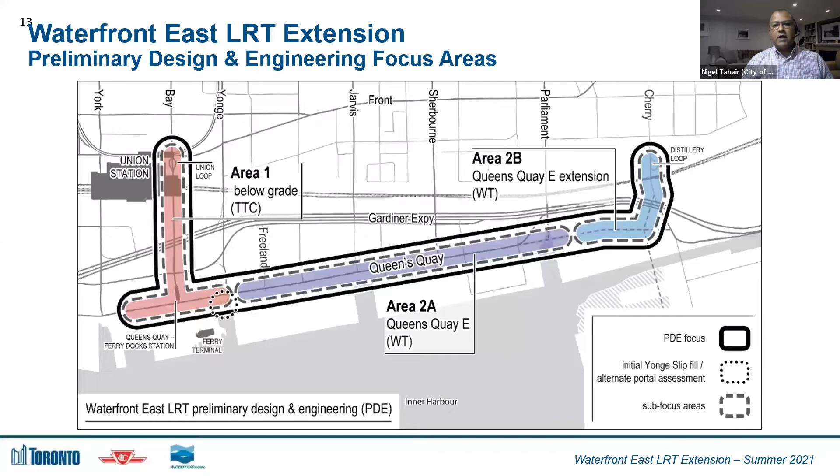The second component of the study is the surface section, starting at the portal where it meets Queens Quay, roughly at Yonge Street, and extending over to the silo building just on the east side of Parliament Street. The final section of the study is a new section of Queens Quay that will be built over to Cherry Street in the coming years, and then a connection that ends at some point on Cherry Street. That's the overall scope of the project.

In terms of the timeline and where we are today, we're in our second round of public consultation. We have one more planned for early fall this year, which will lead to a report on the project to executive committee and to council for a decision and direction. The date we're targeting for that final report is October 27th, which is executive committee.

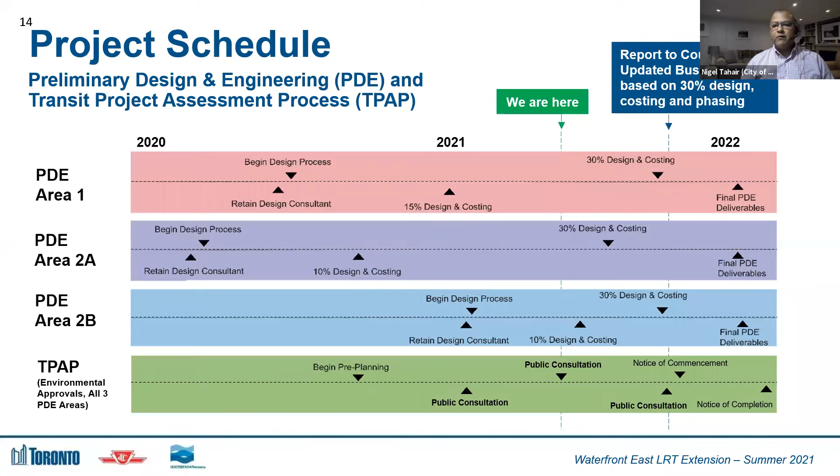And following that, it will go to city council in November. We're generally on schedule for this project, although time is compressed as we get into the summer period. Following the report to city council, we'll be presenting the overall costs of the project, the 30% design, the business case, and also our notification to proceed with the environmental project report. This all sets us up, as Councillor Cressy said, in time for the budget process, which goes into early next year.

In terms of upcoming reports, we do a number of interim update reports. Just last week, I mentioned at our SAC meeting that we are aiming for the latest update report to Executive Committee on July 6th. That update report has since been updated -- that's what happens in just a week's time around here.

The Waterfront project, as well as the Eglinton East LRT project, won't be covered in that update. That report is focused on all of the other major transit projects going on in the city right now, and that's the focus of the report. So look out for -- actually, sorry, we won't have a further update there. The next report will be our own project report, coming in the fall.

And with that, I will turn it over to Vincent from the TTC to provide an update and design refinements for Area 1. Thank you, Nigel. Hello, my name is Vincent Teng, and I'm the TTC Project Manager for Underground Focus Area 1.

Tonight I'll be presenting the update to the preliminary design of Union and Queens Quay ferry dock stations, including new information on the portal design. I will also speak to the opportunity for Bay Street enhancement. Next slide, please.

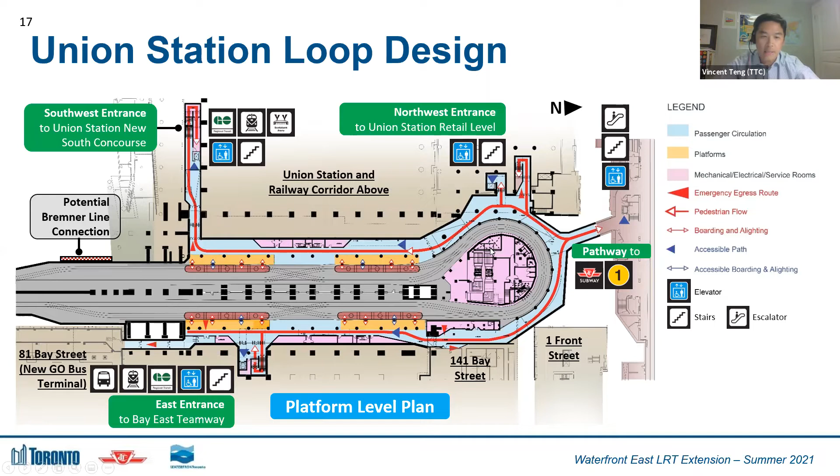In terms of the new entrance connections, this updated plan shows the latest design development, where we have 4 key accessible connections to the expanded station. Going counterclockwise from the top right, we have the northwest entrance to Union Station retail concourse level. At the top left, the southwest entrance to the future Union Station new south concourse. At the bottom of the sketch, the east entrance to the Bay East Teamway level. And finally, at the extreme right-hand side, we will be maintaining the existing pathway connection to Line 1 subway. Next slide, please.

Let me highlight some key aspects of the design that have progressed based on previous public feedback. As Nigel said, this is important as the design continues to evolve towards a 30% design level completion. The updated design now recommends a full station build-out with 4 new streetcar platforms in phase 1 implementation of the project. To ensure maximum pedestrian flow to meet future projected ridership demand, and at the same time reduce platform overcrowding, the design also maximizes the use of pedestrian pathways and platforms, including provision for seating for the public.

Based on further design coordination with Metrolinx and other stakeholders, the size and location of the proposed entrance connections have been refined to ensure ease of access, wayfinding, and connectivity between the adjacent building and GO Transit, which now includes a fairly direct indoor access route to the new GO bus terminal from the east entrance.

Now, there was strong support based on previous feedback for seamless fare-paid access between the streetcars and the Line 1 subways. As such, that feature will be kept, and we will not be introducing a fare line between streetcars and subway.

And lastly, on this slide here, just to note that the design will further be developed to ensure that the station finishes will be really high quality, durable, and the design also protects for good opportunity to integrate station art into the station walls.

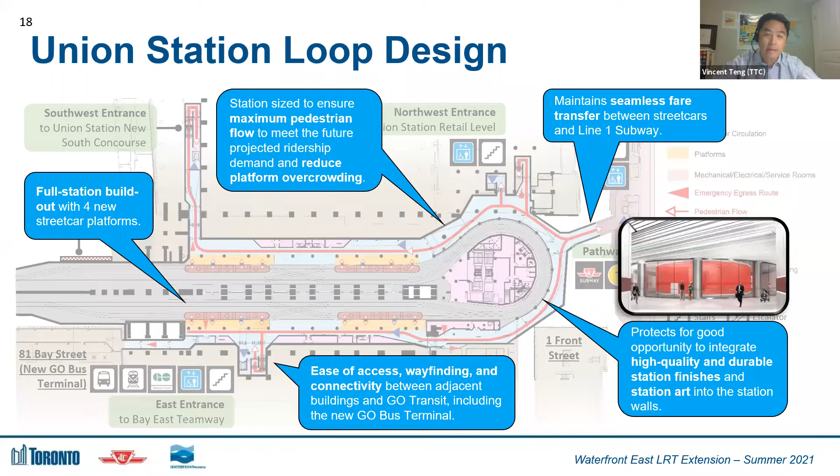So this slide shows updated rendering view for the station looking north, reflecting again the recommended full station build-out and highlighting the 4 key connections into and out of the station.

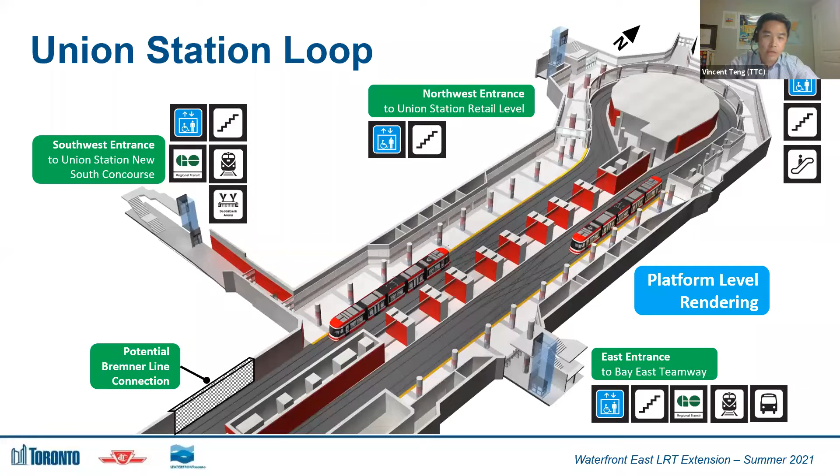One key thing to point out for the southwest entrance is that transit users who want to catch, let's say, a southbound streetcar from the GO platforms in the vicinity, or even after a Raptors game in the Scotiabank Arena, will now have a much more direct and closer indoor route as opposed to currently where they have to walk all the way to Front Street and access the streetcar station from the Union subway station area. Next slide, please.

Lastly, for Union Station, here's a cross-section of the new station showing really an idea of the station reconstruction and its relationship from the TTC track and platform level as it relates to the Union Station retail concourse level, the Bay Teamway and street levels, and lastly, the GO Transit platform level at the top. Next slide, please.

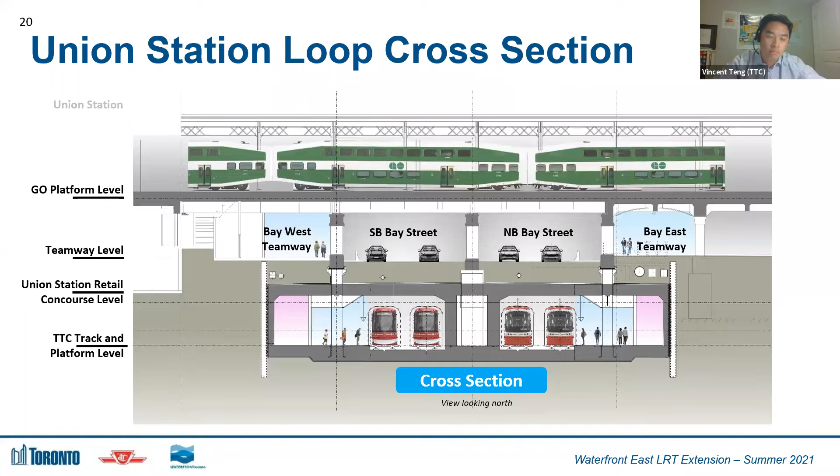Now moving on to Queens Quay Ferry Dock Station. Again, to recap, the major proposed scope of work at this station includes reconstruction of the existing 2 platform stations to accommodate a total of, similar to Union, 4 streetcar platforms.

Based on further design coordination with stakeholders, again, the design continues to protect for good accessible access to and from each streetcar platform. On the sketch here, you'll see that the main station accesses are located on the south side, or the left-hand side of the sketch, where on the west platform, or the top half of the sketch, we have an enhanced entrance with a larger elevator and larger stairs to the street level.

On the east platform, we have further coordinated with the city to ensure that the future redevelopment of the site at 11 Bay will incorporate an integrated access to the street level.

One key new feature to highlight also is the level crossing between the streetcars that we have added, to allow ease of access between platforms during regular day-to-day service when passenger volumes are lower.

Now drawing your attention to the cross section of the station at the bottom right corner. I apologize for the smallness of that cross section, but the key things to highlight is that in the next few slides, I will just talk to the design update to the proposed pedestrian tunnel level, which is at one level beneath this track level. And on the plan sketch here, you can sort of see the outline of this pedestrian tunnel beneath the platform level.

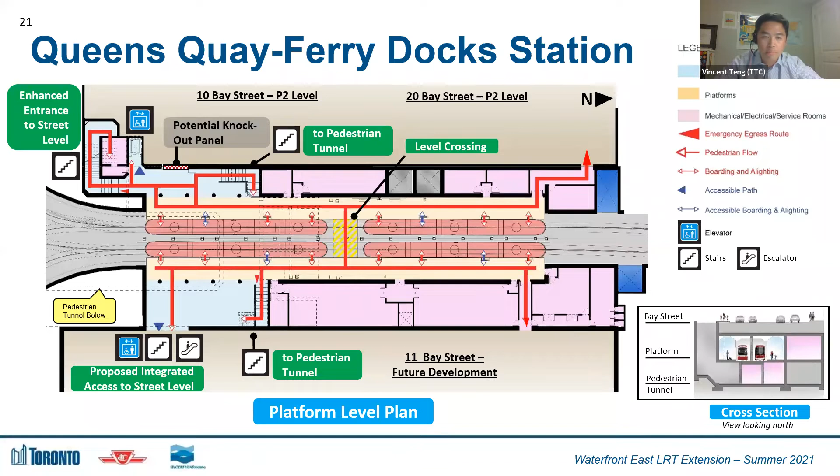So to recap, the proposed pedestrian tunnel here connects passengers between the station platforms and also allows passengers to exit to or enter the station from the south side of Queens Quay via a new weather-protected accessible entrance that is currently located at the southeast corner of Queens Quay and Bay Street. Next slide, please.

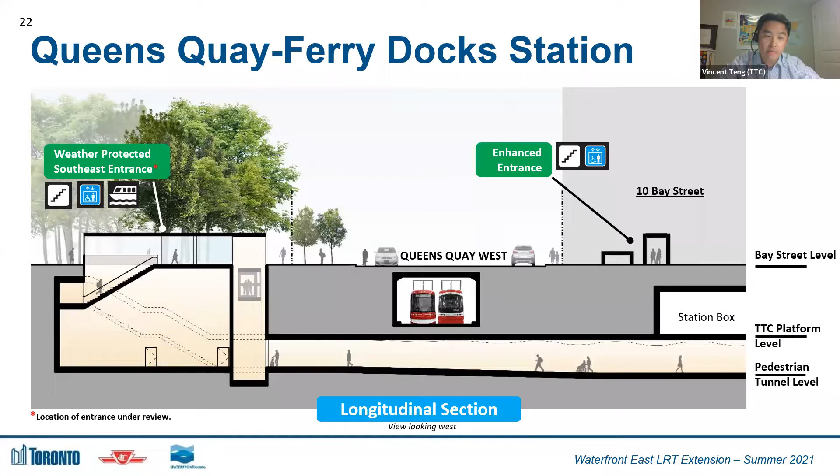So this is an updated rendering of the station looking west that really clarifies the relationship between the various different station levels and the connecting tunnels and portals.

So we can see the proposed new platform level with the connecting east-west running streetcar tunnel to the south, or really on the top of the page, where really streetcars can enter from or exit to the Queens Quay street level above.

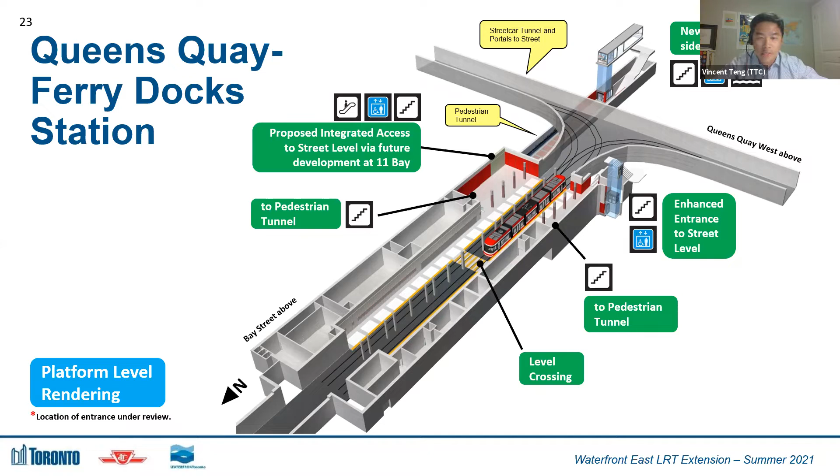With the main accesses located at the south end of the station box, pedestrians and transit users leaving the station platform areas and wanting to go to the ferry docks terminal, let's say, have the option of taking an indoor route by going down to the pedestrian tunnel level, which allows them to exit to the south side of Queens Quay. Okay, next slide, please.

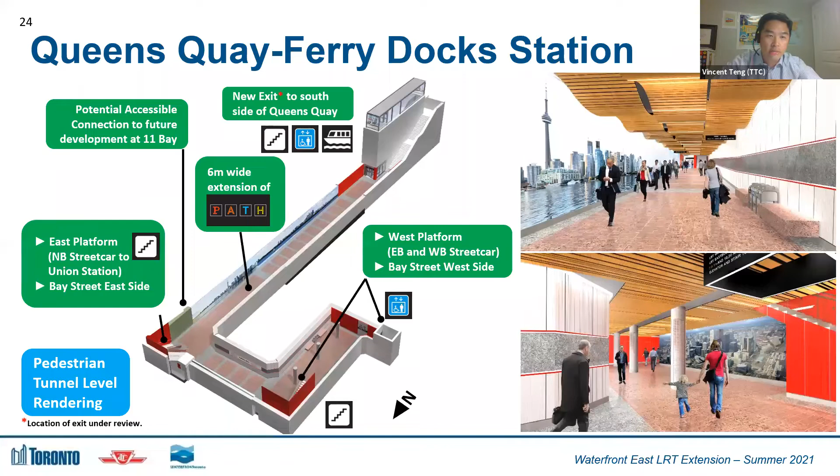Highlighting some of the key aspects of design, we've heard really good support for keeping the underground pedestrian tunnel as a good alternative to get to the south side of Queens Quay. The updated design maintains and further enhances the proposed underground link by providing a fairly generous 6-meter wide tunnel connection, with ample space to accommodate event crowds and ample seating.

Similar to Union Station, there's a good opportunity to integrate station finishes and station art into the station walls. You can see that from the rendering ideas to the right, where the design team has begun to explore different high quality and durable station finishes and materials in the context of the waterfront area.

The design also protects for a good integrated connection to the adjacent properties, which includes future redevelopment of the site at 11 Bay.

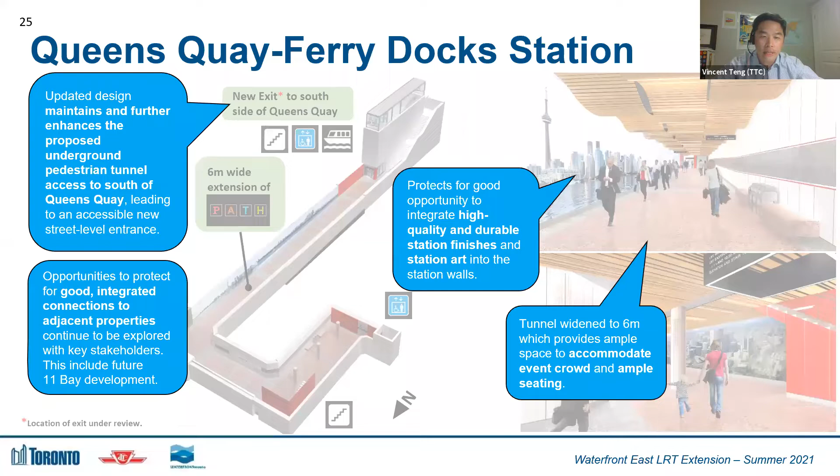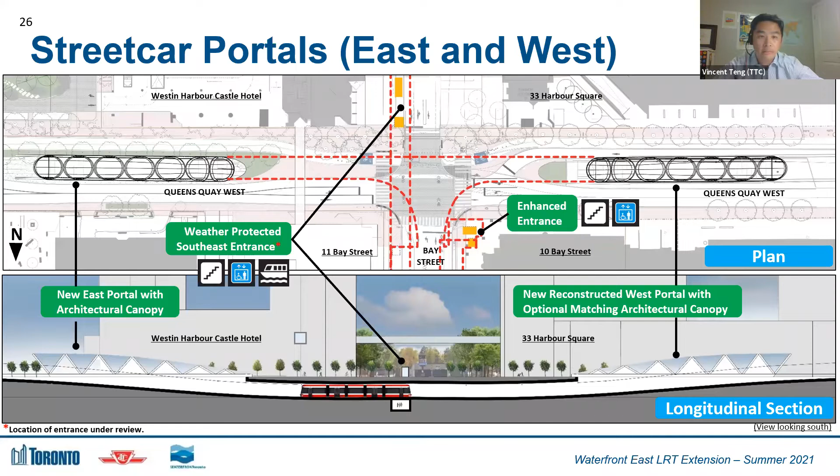Based on previous public feedback, the design continues to protect for the potential of earlier east-west streetcar service. To minimize unauthorized vehicles from entering the portals, options have been considered to minimize these events, especially at the west portal. Some options include, but are not limited to, installing curbs, bollards, and enhanced markings. We also have embedded tracks within the portal area that will allow these unauthorized vehicles a second chance to leave the tunnel before it's too late.

Lastly, regarding the streetcar portals, there are some concerns about streetcar noise. In addition to noise reducing measures already implemented in the current low floor streetcars, the new requirement to rebuild the existing west portal allowed the design team an opportunity to further optimize the track design to reduce the noise generated from streetcars moving into and from the station.

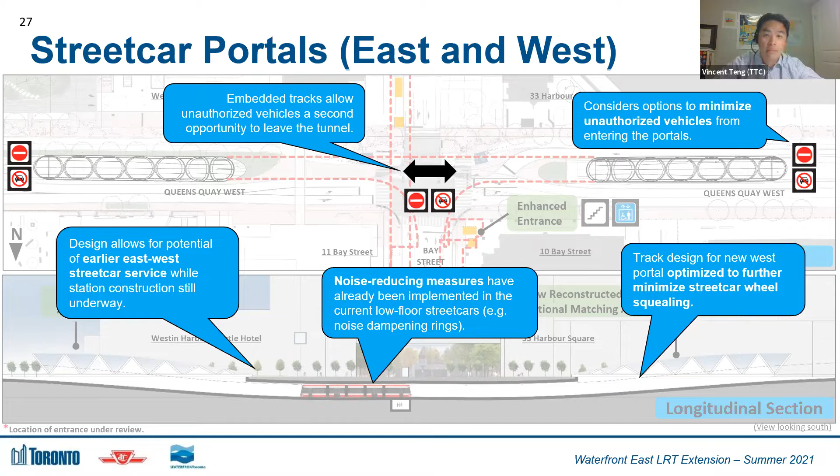The canopy structure currently envisions a primary arched rib structure made up of a steel profile with an inlaid wood system. On top of that, an architectural woven steel fabric will be used to create the canopy skin, providing a low maintenance option for the canopies. These materials are intended to capture the differing light conditions during the day and lighting strategies for nighttime animation that could introduce potential colors and transitions coordinated with vehicle movement.

As the design moves forward, we will further explore how the structure can reflect the site-specific conditions of the waterfront and its connection with the experiences of the lake and the proposed Yonge Street slip and infill. Further testing of the option materials will be developed in future design phases, including the lighting design and different patterns and opacities on the skin material mentioned before.

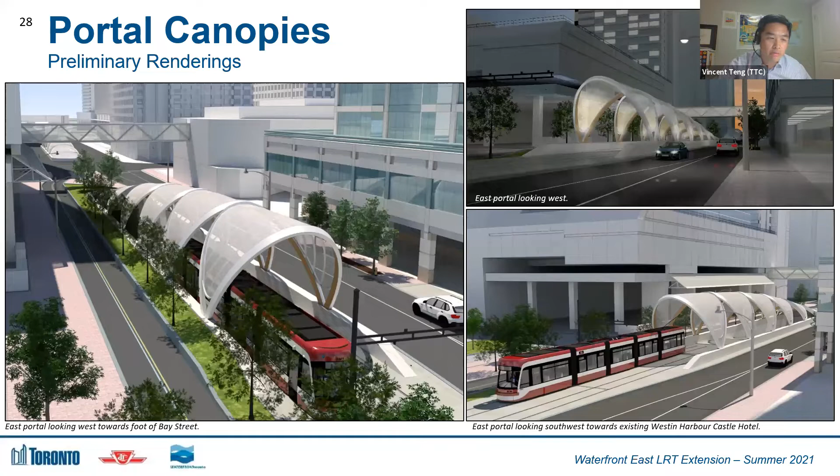So with the construction of the Union and Queens Quay stations, much of Bay Street between Front and Queens Quay will need to be rebuilt towards the end of the project. The project team recognizes that this is a fantastic opportunity to build Bay Street back differently than it is today. So with that opportunity in mind, if you can go to the next slide.

It is not possible to incorporate everything as part of the current public consultation. We're really seeking the public's feedback for which element to prioritize, in order to allow the design team to take that feedback and further investigate and feed into the design development process. Based on these important feedbacks, more refined plans for Bay Street, working with Waterfront Toronto and our city partners, will be made available in our next round of public consultation in the fall of this year.

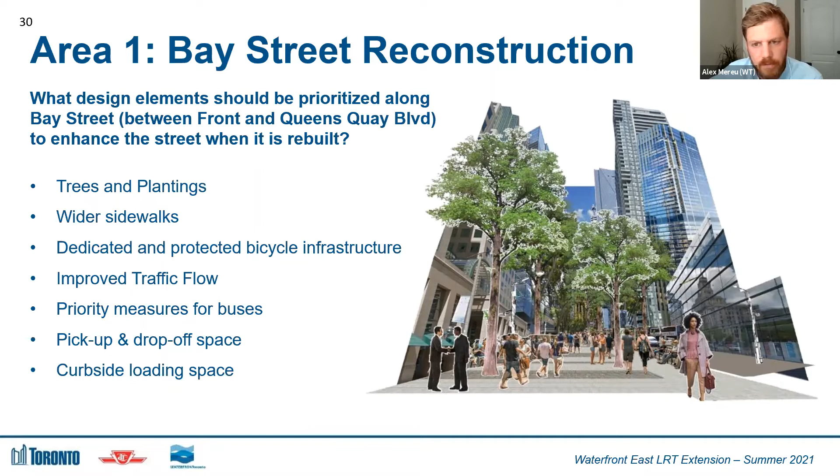So I will just be speaking about areas 2A and 2B, that's the surface section of Queens Quay. Starting with 2A, that's the section from Bay Street to just east of Parliament Street. Most of these items are just updates from our previous public meeting in the winter.

Starting with the portal location: in the winter, we had presented to the public two potential options for the portals - those are the portals that Vincent just showed renderings of, where the streetcar comes from underground and gets to grade. We looked at option 1, east of Yonge Street, which was previously identified as a preferred option in the 2010 environmental assessment, and then we looked at an option west of Yonge Street.

The main reason for looking at the option west of Yonge Street was that, through the design process for option 1, it revealed a lot of cost savings from reducing the portal length, as well as a reduction to construction impacts. We also got public and stakeholder feedback, and there's majority consensus that option 2 also enhances transportation safety and enhances public realm opportunities at the base of Yonge Street, partly because of all the cost savings and the reduction to construction impacts.

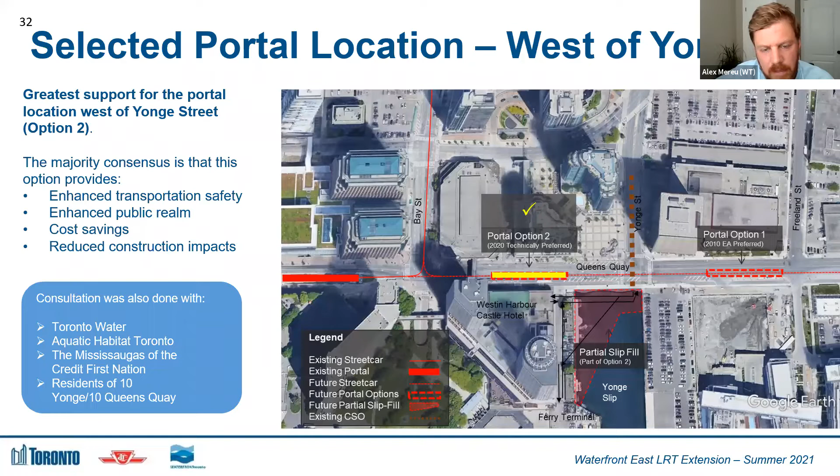As well as consulting with the public in the winter, we also had discussions with Toronto Water, Aquatic Habitat Toronto, the Mississaugas of the Credit First Nation, and the residents of 10 Yonge and 10 Queens Quay - that's the buildings across the street from Yonge Slip. With that, we've taken portal option 2 further into the design - taking it further into the 30% design.

I wanted to show the concept for the Yonge Slip fill, which was shown in the winter public meeting. We got feedback from the public as well as from the residents across the street about some concerns with the slip fill, particularly with reference to the buses being parked parallel to the street, and the worry that those buses would block views to the water. So we've revised the design through the design process and come up with the version we're about to show.

That's the summer 2021 version, which realigns the buses so that they're perpendicular to the street and brings them closer to the hotel, so we don't impact the current views enjoyed to the water. I also wanted to highlight that the blue hatch line on the left in the existing condition shows where the current dock wall is. Then the red line in the two images in the middle and to the right indicates where the new dock wall would be for those respective options.

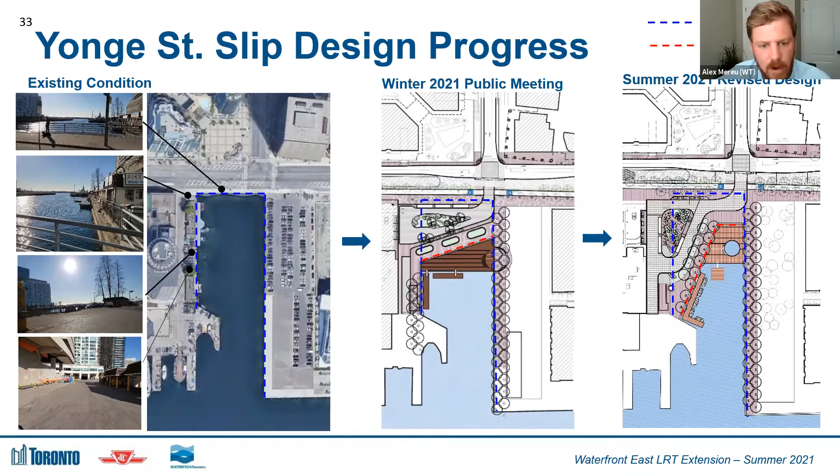So just a little bit more on the design update of Yonge Slip - we heard a lot of good feedback, as mentioned earlier, about the opportunity with this concept to create an iconic public realm at the base of Yonge Street. So that's what we see here, with about half the slip fill being a public park as well as a wave deck, integrated also with the park on the right side of this image - a future park to the east of the Yonge Slip, which is currently a parking lot. There are plans to turn that into a public park as well.

There's also a lot of public support for water taxis and recreational watercraft in the Yonge Slip. It's our ambition to maintain the marine activity that's in the slip today.

We don't want to hinder that, and also open up the opportunity for more access to the water from the public. We've also heard feedback about enhancing pedestrian circulation from the street to the wave deck. So we've added crosswalks as well as an island median in the middle, where bus loading happens, to better connect people from the street to the wave deck.

As I mentioned earlier, the buses are now oriented to the west side of the slip, closer to the hotel. They're actually parked in this image, not on fill, but where the current driveway to the ferry docks and parking is located. So we did our best to keep the buses to that orientation and that side of the facility.

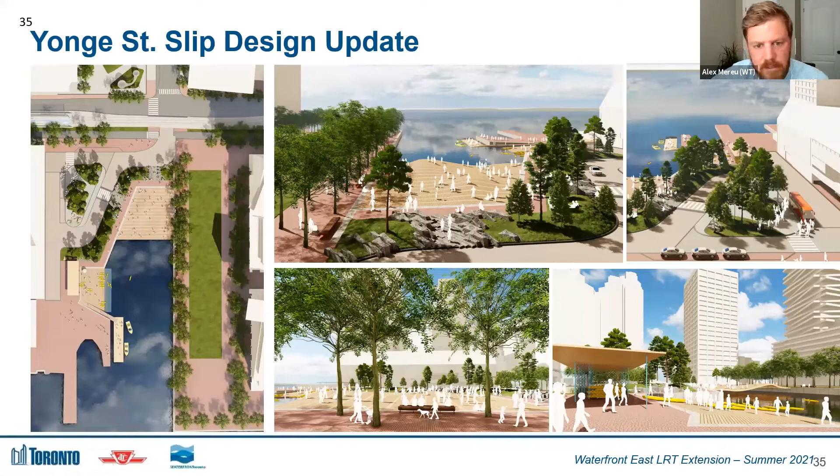There's another image in the middle, top, of the wave deck with the transportation facility to the right. And the top right image shows that transportation facility for cars to access the hotel, and buses and trucks to circle around, and trucks to access the ferry docks, as well as deliveries and things that go to the island via this route. We also show a rendering in the bottom right showing opportunities for recreational watercraft launch.

Moving on to another item we consulted on in the winter, that's how the intersections would be treated at the arrival zone, the head of slips. We took Jarvis Slip as an example in this case.

In the winter, we showed option 1, a more delineated approach, focusing on the intersection. In this delineated option, the Martin Goodman Trail asphalt would continue through the south side of the intersection, and the north-south crosswalks for pedestrians would extend south of the trail, with a push button. The intent is to further delineate the space for trail users and the space for pedestrians.

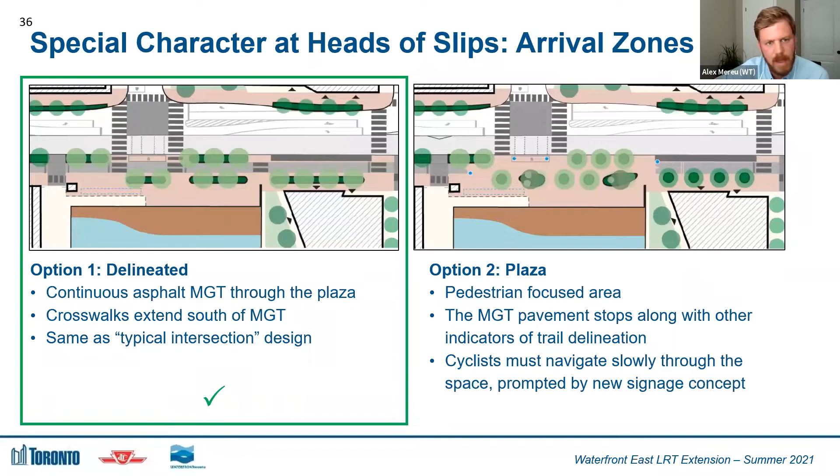In option 2, we looked at an alternative with more of a mixing zone, where the trail would stop and become a pedestrian area, and cyclists would have to slowly navigate through that part of the intersection. Through public and stakeholder feedback, option 1 was preferred, and that's what we've carried forward through to 30% design. Some of this is just a screenshot from the roll plans.

I wish we could be in the same room to actually roll these plans out on the table, but this is what we can do for now. Let me highlight some of the feedback and how we've addressed it: extending those crosswalks south of the trail, continuation of the Martin Goodman Trail asphalt through the intersection, additional seating at the head of slip, and opportunities to integrate this head of slip with the public amenities to the right.

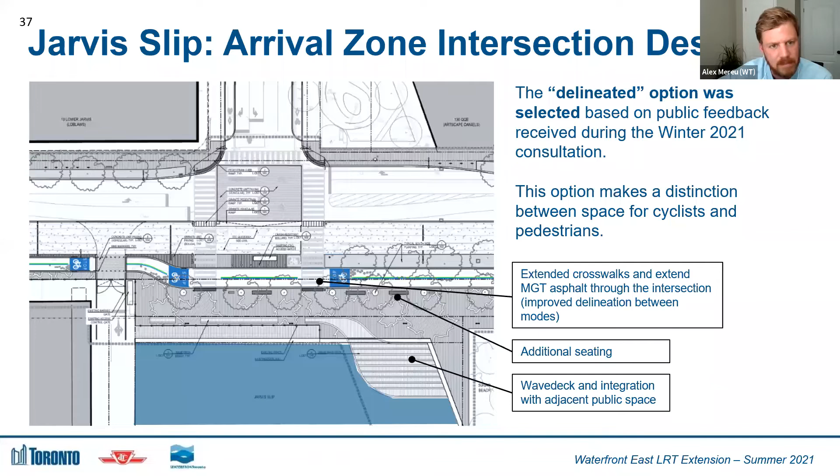In the case of Jarvis Slip, that would be Sugar Beach. There's an opportunity to build the wave deck here to better facilitate that desire line from Jarvis and Sugar Beach North to Sugar Beach South via the intersection. Unfortunately, we can't extend the wave deck across the full slip because that's where the sugar boats land to unload the raw sugar, so it's important to maintain that marine activity there.

Whereas the actual programming of the slip—and you may have seen some other consultation or outreach from our communications team on the possibilities and our vision for Parliament Slip—how that slip itself is designed and programmed will be part of a different consultation process. It's part of a different project, so stay tuned for more updates on Parliament Slip and how you can be involved in that design process.

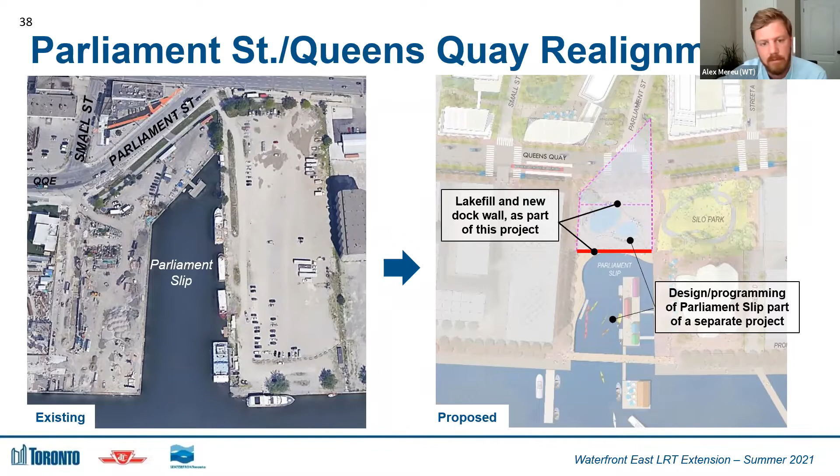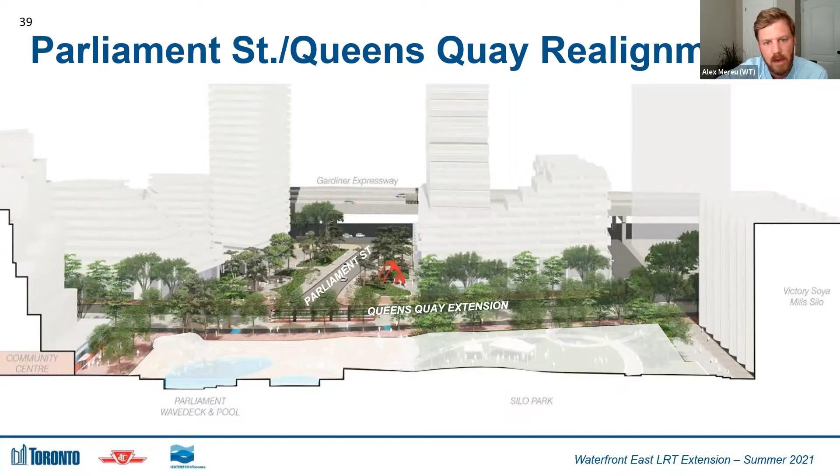Here's just another view looking at that new intersection of Parliament Street and the Queens Quay East Extension in the context of the Quayside development.

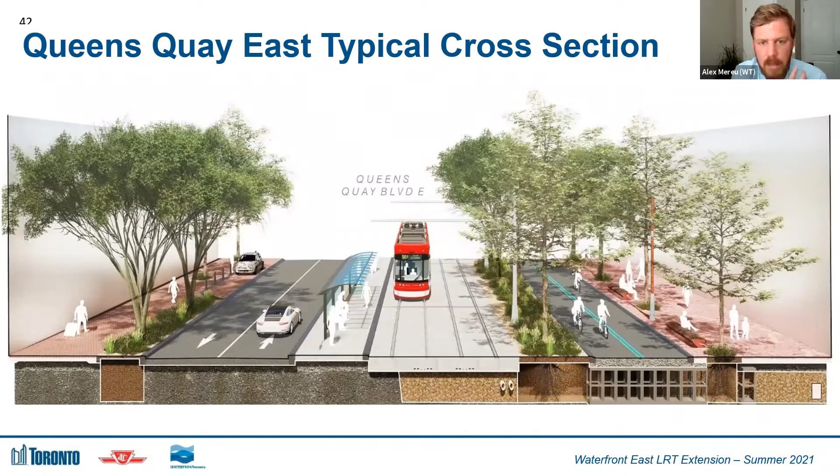And so here's just a typical cross section. This is the cross section we want to achieve across Queens Quay East to Parliament Street. There are some pinch points, however, where existing land use won't allow us to realize that full vision.

So in particular at 95 Queens Quay East, there's a stretch there where our full right-of-way that I showed in the previous slide, we won't be able to build given the constraints of this location. So this is where we'll have to pinch the Martin Goodman Trail to 3 meters instead of the 4.5 that was shown in the previous image.

And the pedestrian promenade will also have to get pinched here. But the idea is still to maintain both a promenade condition and a Martin Goodman Trail condition through here. They're just narrower, and we would also lose the planted buffer between the trail and the TTC right-of-way in this condition, although railings would be placed along the south side of the streetcar right-of-way to further separate the trail users from the streetcar.

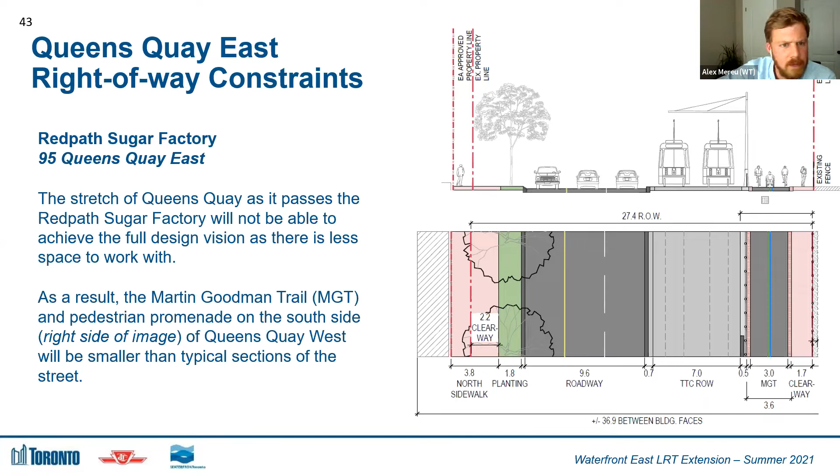So now getting into area 2B, so this is mostly new information. We'll talk about the scope, and then I'll get into the cross-section, how it differs slightly from the rest of Queens Quay East, and then some options for how we get under the rail corridor.

So the scope for this project is to design the streetcar through that section of the roadway, as Port Lands flood protection will deliver the street as well as the public realm, but not the streetcar through that section. So then there's another tricky part, and that's how we get under the existing rail corridor, how we get the streetcar under the rail corridor and then tie into the existing line that currently ends at Distillery Loop.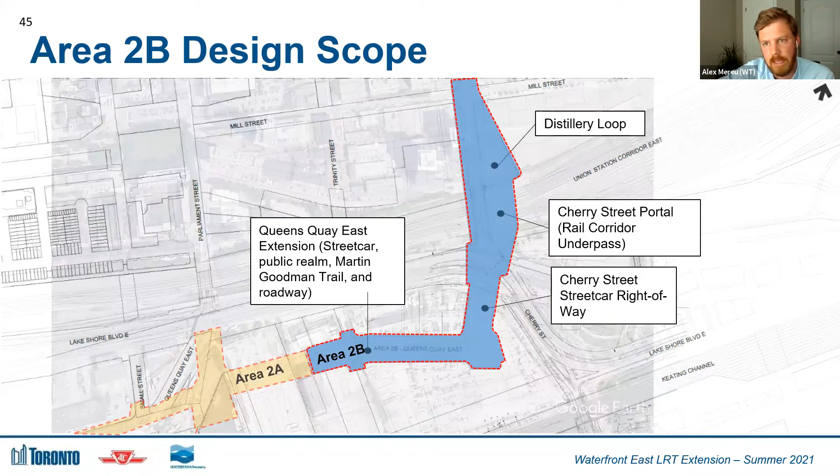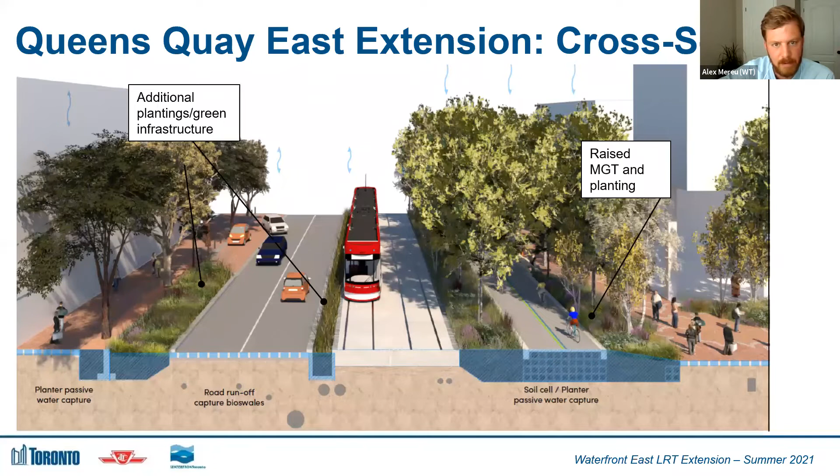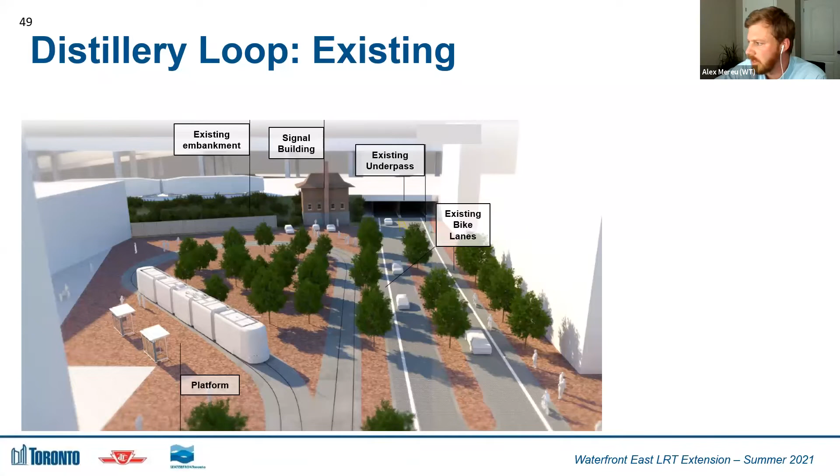This is the distillery loop. When the streetcar extends, the existing distillery loop would be removed, creating an opportunity in that space for an enhanced public realm in the surrounding area. Ultimately this service, currently the 504A, would extend south from its current terminus all the way to the loop on Polson via Cherry Street - a loop at Cherry and Polson, which is part of the Waterfront Transit Network plan.

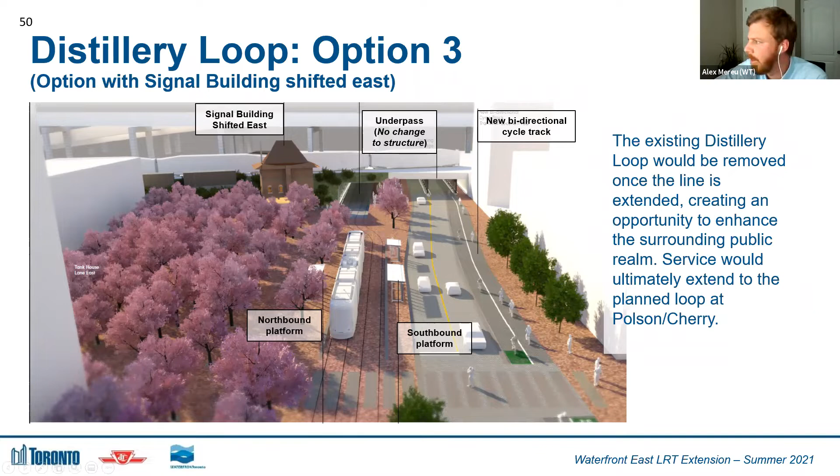Here's a slightly different version - the one I showed, option 3, is where we move the building just east of the tracks. Option 4 is where we keep the building in place and the tracks align around it. There are some technical merits to each of these, which we'll get into in more detail in our next round of consultation. But we're looking for feedback on the preference between option 3 and 4, and what you see as the opportunity for the public realm here as well.

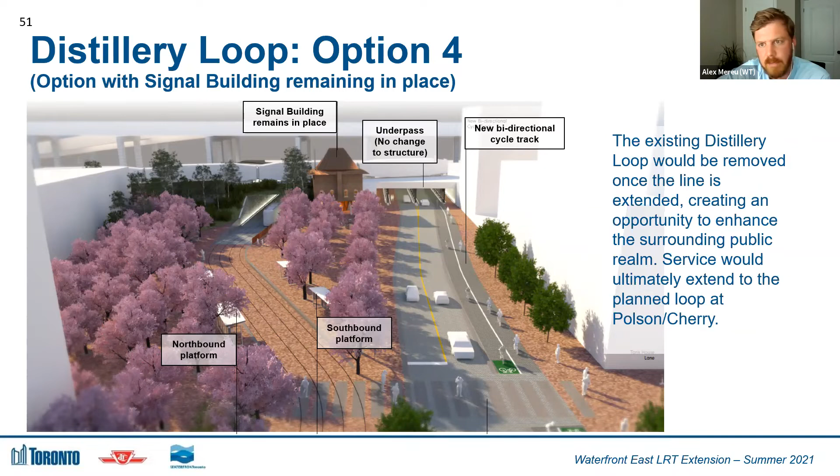So now we'll just get into the phasing and implementation - the phasing of Union Station and Queens Quay Station, expediting interim transit to Queens Quay East, network phasing and implementation and coordination. Back in the winter, we asked three different questions.

The first was how much expansion work is needed in Union Station in phase 1 of the project. As Vincent confirmed, we're confirming that the full 4-platform design for Union Station, and the full concept for Queens Quay Station, is required to accommodate 2041 travel demand, and therefore it's recommended that it is built in the first phase of this project. That's the full vision of the concept that Vincent shared with you.

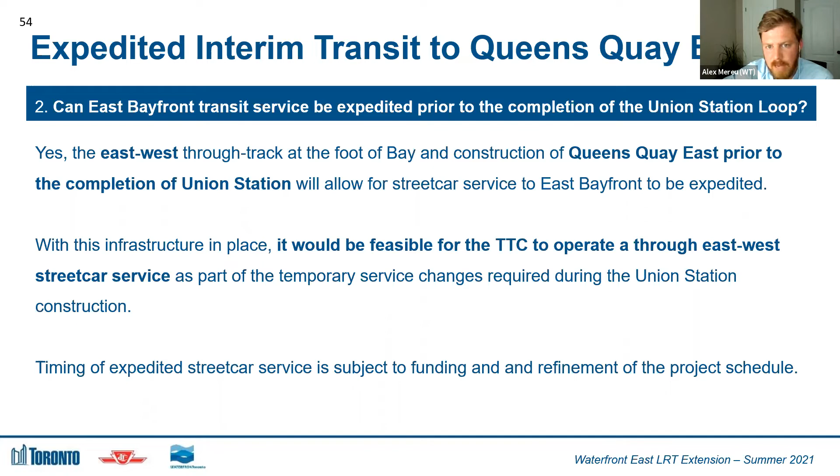The next question was, can East Bayfront transit service be expedited prior to the completion of the Union Station loop? The short answer is yes. The east-west through track at the foot of Bay and construction of Queens Quay East, prior to completion of Union Station, will allow streetcar service to East Bayfront to be expedited. With this infrastructure in place, it would be feasible for the TTC to operate through east-west streetcar service as part of the temporary service changes required during Union Station construction. Just a note that timing of the expedited streetcar service is subject to funding and refinement of the project schedule.

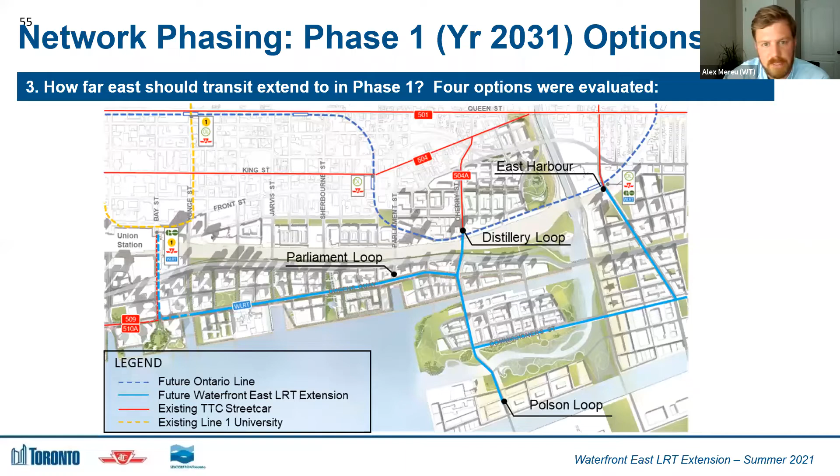So here's some of the evaluation of these options. With Parliament Loop, it's not preferred as there is limited space to locate the loop due to the advancement of the Quayside development.

It also does not deliver the same network benefits of transit before development in the Eastern Waterfront and the Portlands like some of the other options do. It also still requires a significant investment, so a big chunk of money would be required to get to that point.

That's because we would need to construct Union Station. So there's a bit of a lost opportunity to make all that investment and only go as far as Parliament, when there's an opportunity for a little bit of incremental increase in cost to go further east.

The option of the Distillery Loop in phase 1 cannot be maintained once the alignment travels under the rail corridor, due to grading and space requirements, and requires an unplanned temporary loop somewhere else along the line. Alternatively, we could build to Distillery, but first we would have to go to Polson Loop, because that's where the streetcar would have to loop around.

There's also higher risk with delivering the Distillery Loop option in phase 1, as it would coincide with construction of other major infrastructure projects like the Ontario Line and the Lakeshore and Gardiner realignment. So our preference is to go to Polson Loop as part of phase one, from Union Station to Polson Loop, because it has similar costs to going to Distillery Loop but without as many constructability risks.

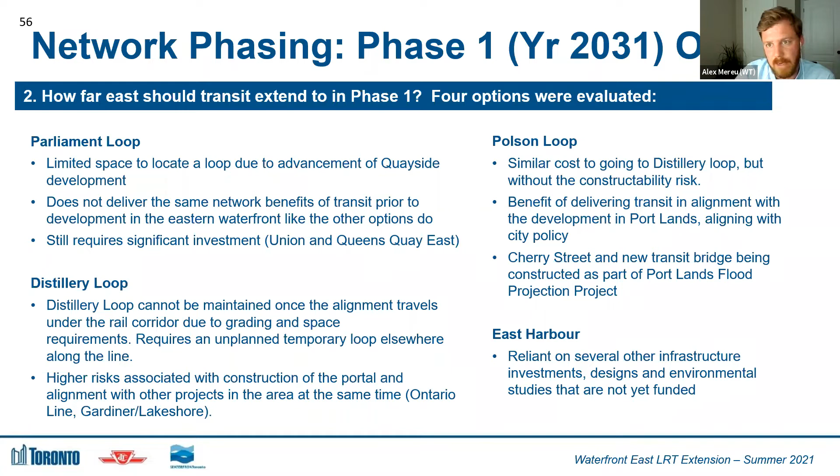Looking at Union Station all the way to East Harbour, it's a bit of a stretch for phase one. It's also reliant on several other infrastructure investments, design, and environmental studies that are not yet funded, so it's not recommended that we go all the way to East Harbour in phase one delivery of the project. So just recapping, this is our preferred phase one: Union to a loop at Polson.

This is in the context of the broader streetcar and bus network. I should just emphasize that the bus routing is just for conceptual purposes. It's not final, but just to show how the gaps could be filled in the network if we went from Union Station to Polson in phase one.

So this is the day that Union Station would reopen after construction, and streetcars are now leaving Union Station and traveling to Polson Loop and coming back.

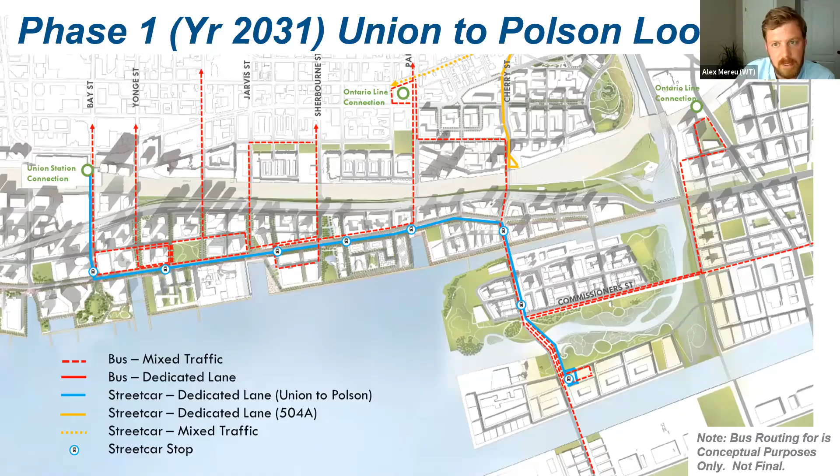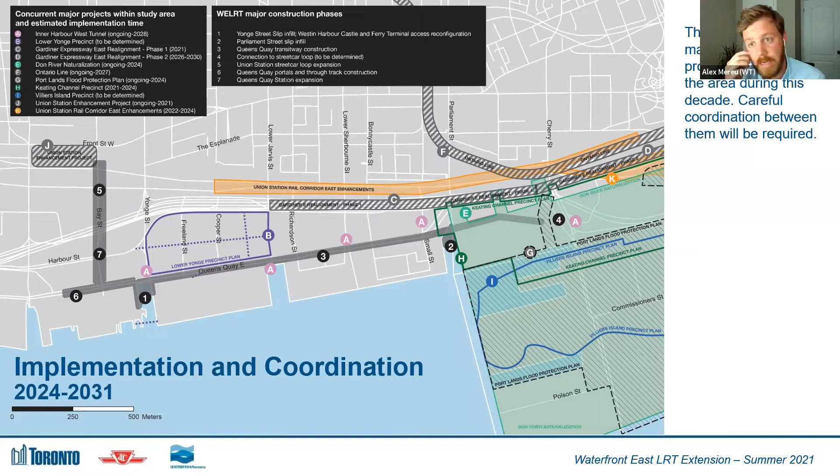Some important notes, I mentioned earlier going north on Cherry first, there are some complications with all the future construction projects happening in the area. This will probably be easier to view separately or online on your own time, so you can look at it in a bit more detail, but really just identifying all the other major infrastructure projects happening in this decade.

We've also indicated our preferred sequencing of our project elements from 1 to 7, starting with the slips, then Queens Quay East and the portals, and then Union Station and Queens Quay Station.

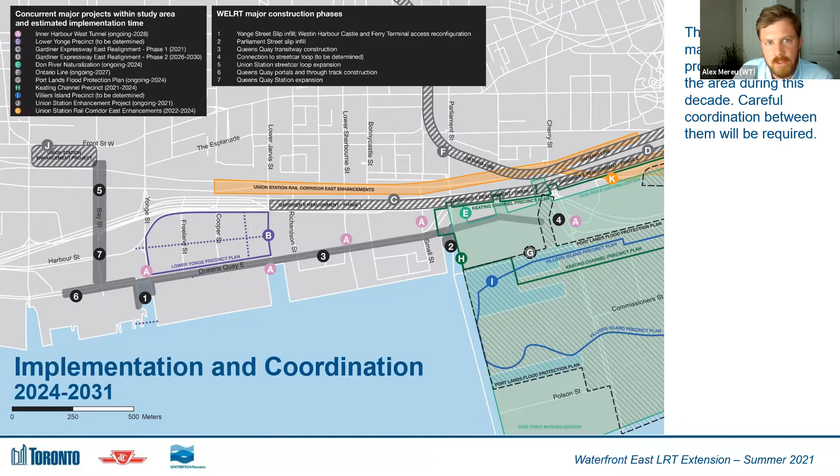There's more detail on this as we get into further level of design and once the construction mitigation strategy is more detailed, but at a high level, at least one lane of traffic in each direction will be maintained at all times during construction on Queens Quay East.

Also, access to all buildings will always be maintained, and there will be an emphasis on pedestrian and cyclist connection and mitigating impacts during construction, per construction management guidelines. Also, there will be a business access plan and communications plan that will emphasize how businesses can remain open during construction.

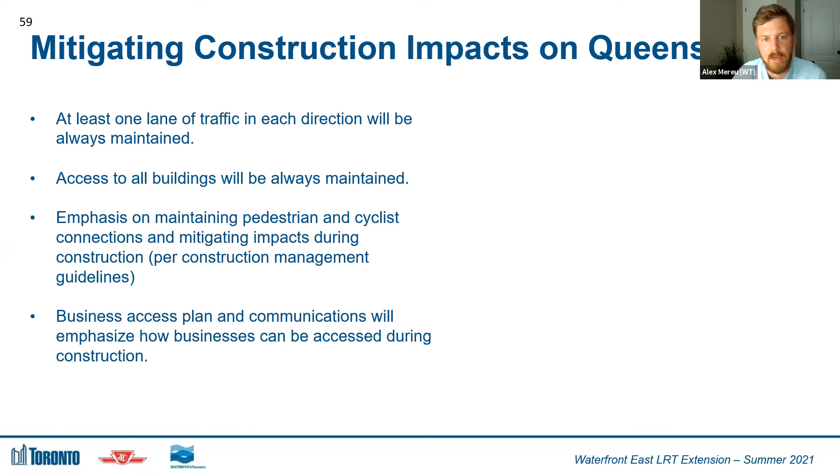So just a quick recap or update on the transit project assessment process, that's the environmental assessment process for this project. As Nigel mentioned, when we go to council in the fall with the updated business case, we'd also be asking council to endorse the draft environmental project report, which would then be released, and that would kick-start the 120-day review period, reviewed by stakeholders and the public for a 120-day period running into February.

Then for the final EPR, we would take public comment and stakeholder comment, refine the draft environmental project report, and publish a final environmental project report. Then there will be a 30-day review and objection period of that project report before it goes to the provincial minister for approval next spring.

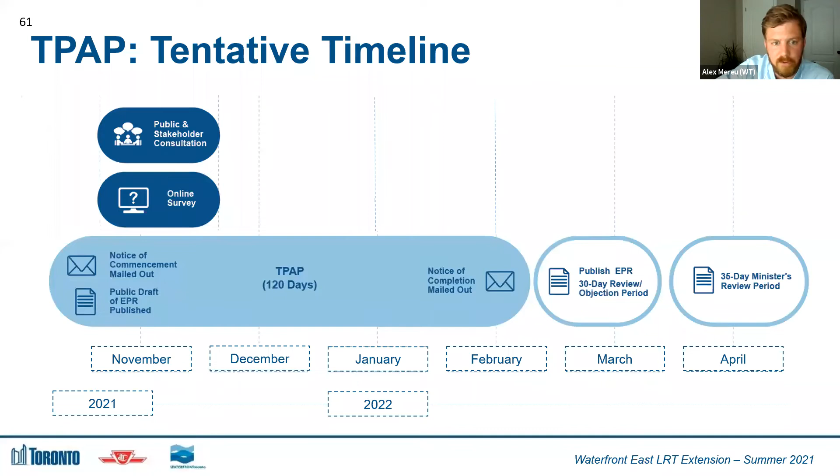So future engagement in the fall of 2021 will focus on the plan for Bay Street after reconstruction. As Vincent mentioned, some of the opportunities at Bay Street, the phasing and implementation update, more design details on Area 2B, a summary of the updated business case which will go to council, and key project impacts and mitigations documented in the draft EPR. So that's it for me.

I probably took a little bit more time than I was hoping, but I hope I gave you a fulsome review of the project update. And now I'll hand it back over to Liz to facilitate the discussion.